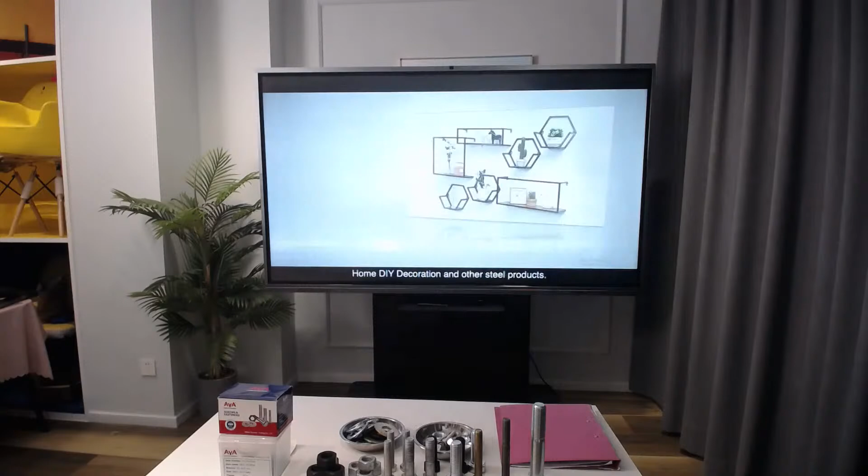We mainly deal in roofing sheets, metal pipes, fittings and valves, wire and mesh, metal fence, iron art, fastener and screw, home DIY decoration, and other steel products. We now work with more than 500 selected and inspected mills of A level to provide our customers with low-cost guarantee. We also maintain long-term cooperation with world-famous contractors, wholesalers, and home centers.

Hebei Sinostar has 6 complete management systems: CMS, Commodity Management System; QMS, Quality Management System; PMS, Pricing Management System; LMS, Logistic Management System; FMS, Financing Management System; and ASS, After Sales Service System. We inspect and supervise the whole process of production, from mill sourcing, order placing, raw materials, manufacturing, packaging, and warehousing till container loading, so as to continuously provide our customers with products and services of high quality.

We have our own logistics department and freight forwarder that are responsible for the last mile logistics, providing DDP destination customs clearance and third-party logistics services for overseas buyers. Hebei Sinostar is proud of its young, professional, and well-trained team with great passion and creativity. Together with the efforts of all members of our group, we believe that Hebei Sinostar will soon become a flagship of the Hebei foreign trade industry.

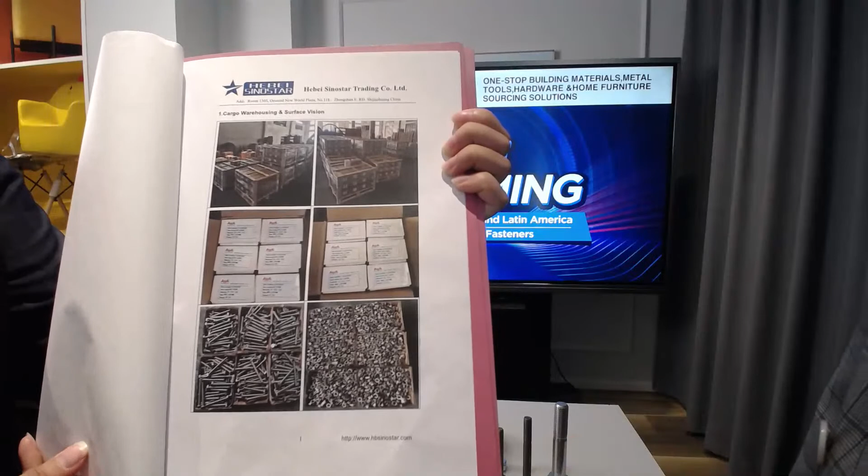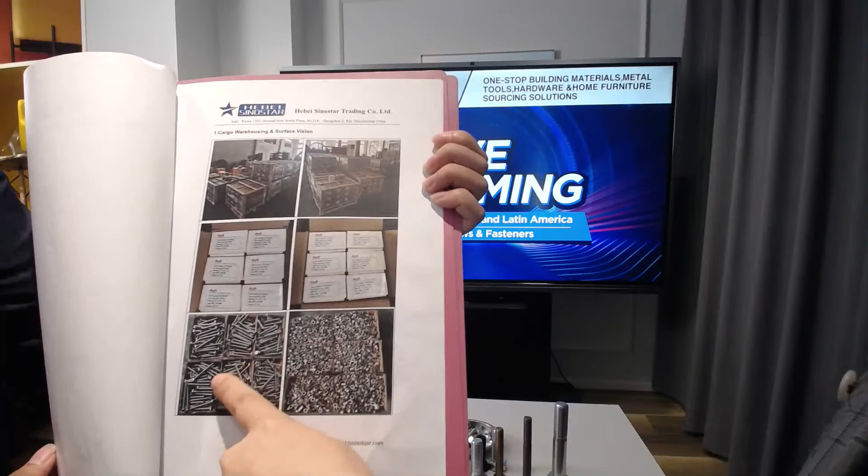The first part of the inspection report is our cargo warehousing and surface vision pictures. On this part, our QC will put the total pictures. The first picture is finished packing with pallet pictures, and opening the box, opening the carton. We can see the inner boxes, and also open boxes to check the surface vision and the difference, and whether there's any problem with the surface. This is to show our customer the total pictures.

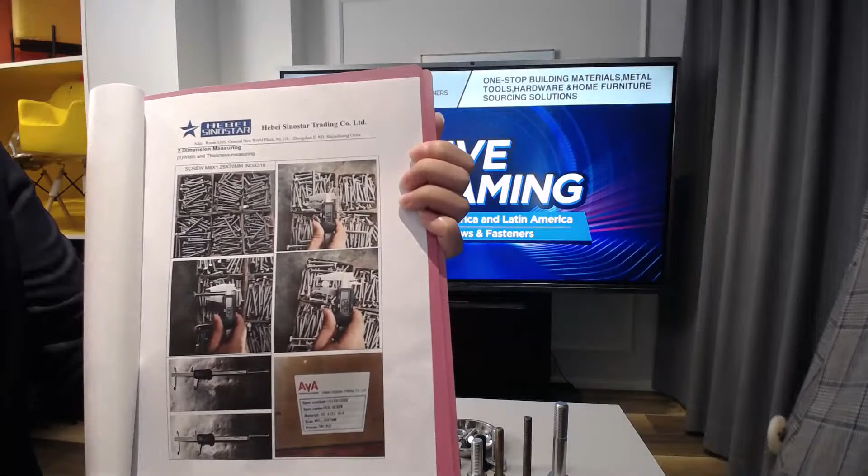Next page is the second part, the dimension measure pictures. On this part, our QC will put the totally inspection pictures and show them to our customer.

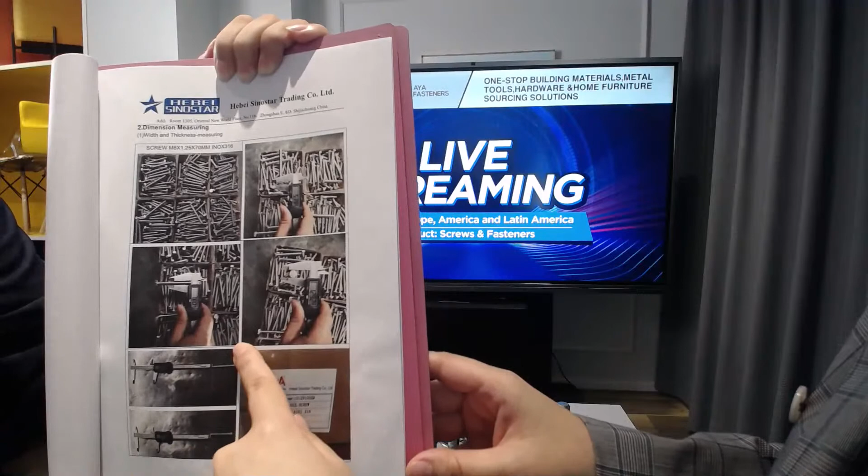This page shows the hex screw product, size M8 by 1.25 thread pitch, length 70 millimeters, material is INOX, which means stainless 316 material. The first picture is open boxes, so it's easy for our customer to check the surface vision. There's also a test picture of the screw head thickness, and a picture of the body diameter and crosswise of the head, plus the length of the bolts. This label is the carton label.

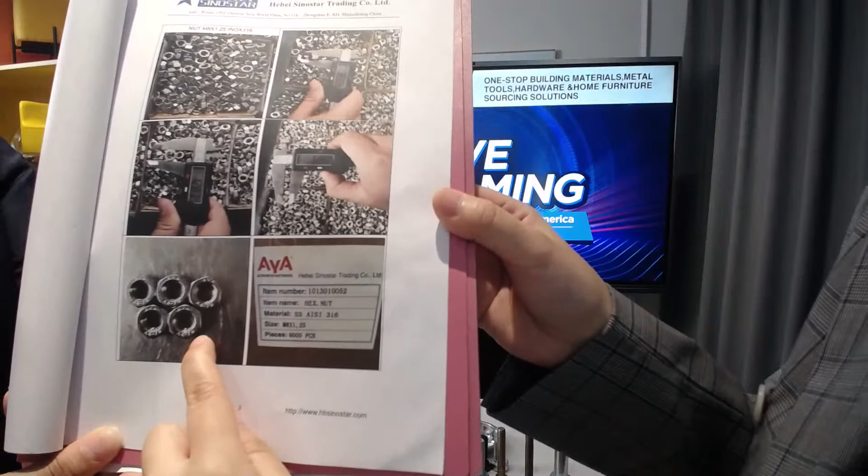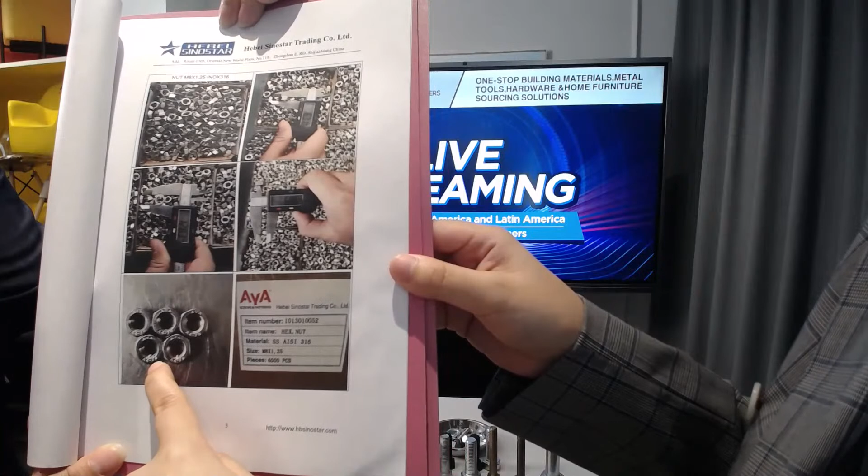Next page shows a different product, the nuts, size M8 by 1.25, same thread pitch, and material is also 316 stainless. The first page shows open cartons, easy for our customer to check the surface vision pictures. You can see the test picture of the thickness of the nuts and the crosswise of the nuts, and this is the inner diameter. There's a different picture showing a label, A4-70, which is the short name for 316 stainless material with grade 70. There's also a label AYA, our company's brand, marked on the head of the nuts surface.

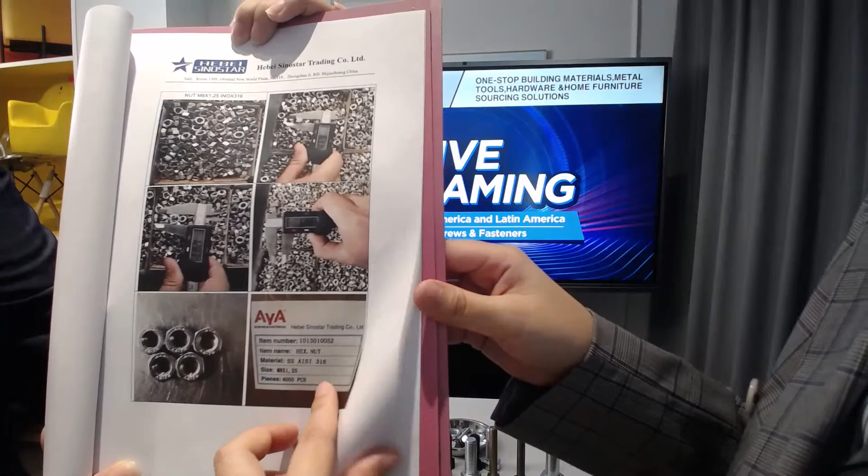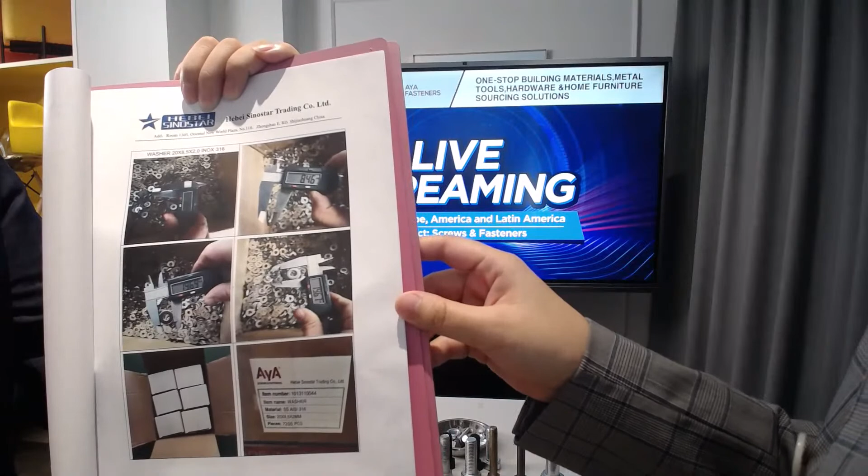This is the nuts inspection pictures. Another page is a different product, washers. This type is a plain washer, size 20 by 8.5 inner diameter, thickness 2 millimeters, material also 316 stainless. This is the thickness test, and here we see the inner diameter and outside diameter. This is opening the carton to check the inner 6 boxes in the carton, and this is the carton label.

This is the second part, where our QC puts the totally items inspection report and inspection pictures on the report. Now let's introduce the third part.

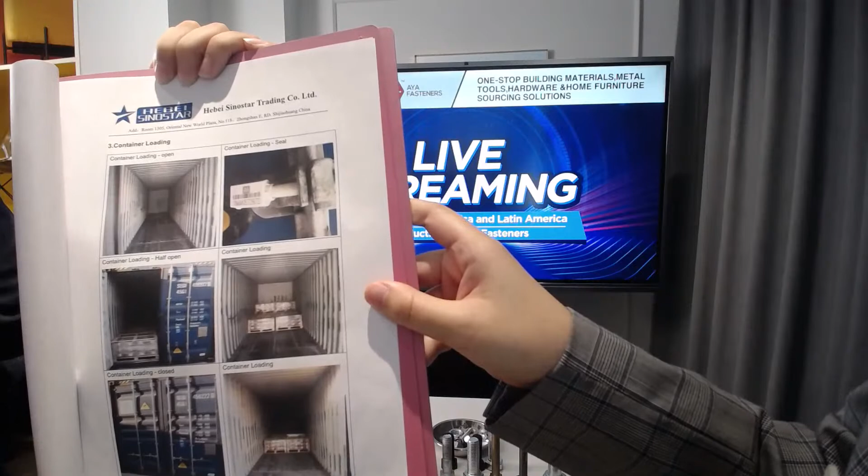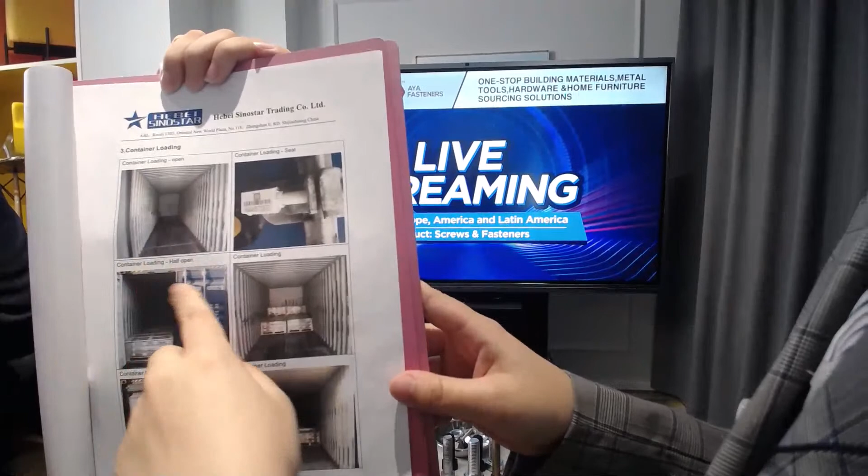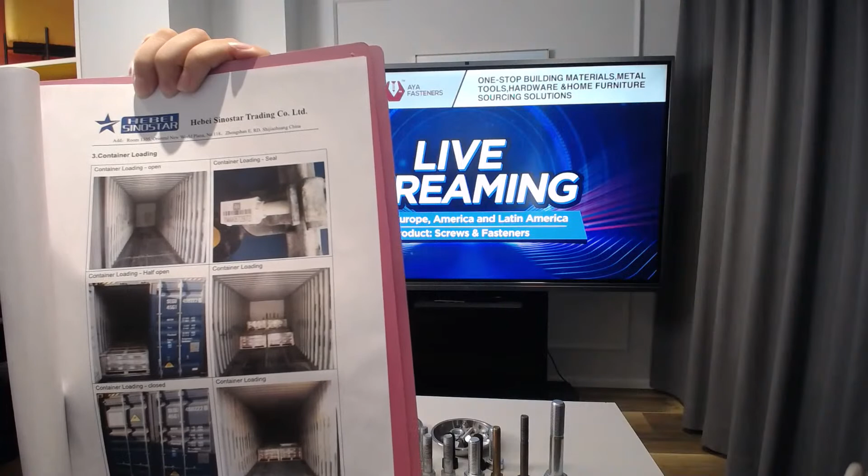The third part is the container loading pictures. On this part, our QC will put the totally loading container process pictures to show our customer. First we see an empty picture of the container, because before loading the container, our QC must check whether there's any damage inside the container. If no problem, then we are allowed to load the container, so we put the empty container picture to show our customer.

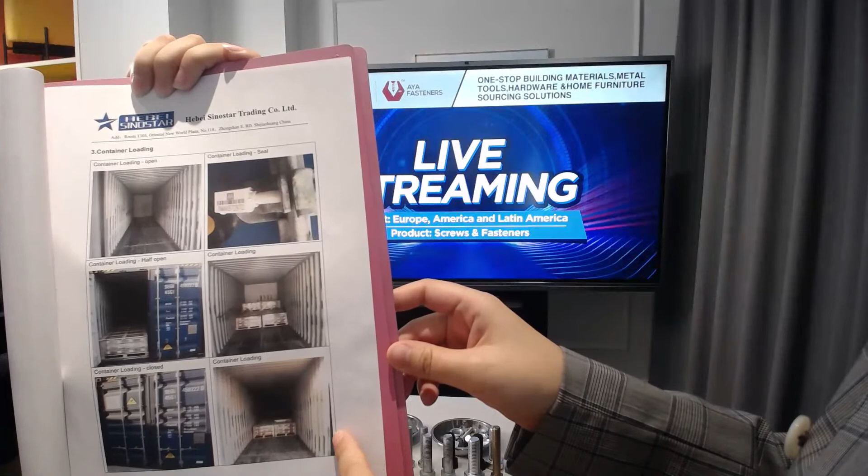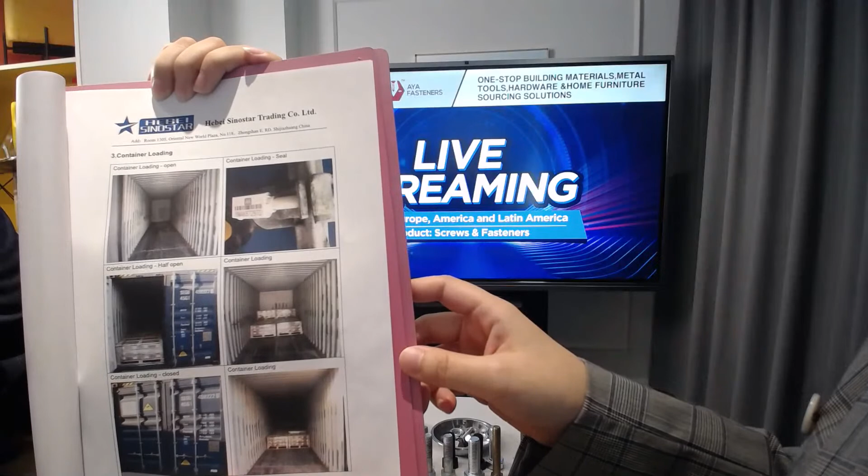We can also see the loading process and middle process picture. After loading, we take pictures like this half-open picture to show the container number, and also the closed picture and the seal number to show our customer. This is the third part.

I think from our introduction, our customer will know about our inspection report and feel more relaxed about our company's quality of products. I think many customers will like this inspection report, it's very helpful, and it can also help our customers save inspection charges.